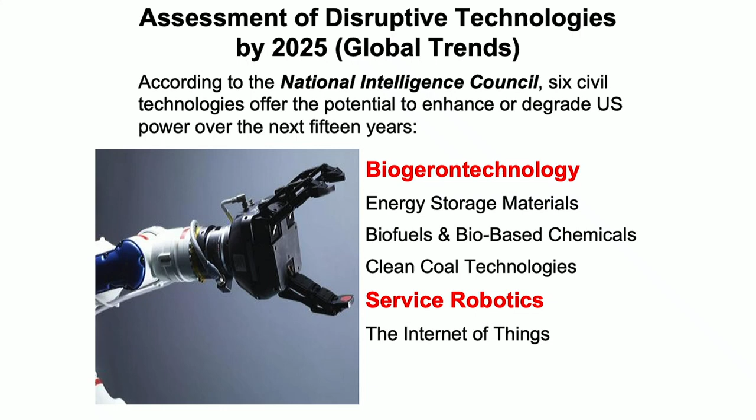And what was really striking to me is that we lose mobility very rapidly. At 70 years old, 20% of the population lose mobility, and by 80, we have 42% of the population, now expecting to live beyond 90 and 100 perhaps by the end of the century. We're going to have really hundreds of millions of people across the world that really have problems with mobility.

And that's one of the places that I see robotics having great help, especially having had parents-in-law living abroad that really needed a lot of attention, and it required ourselves to travel back and forth. So robotics could allow to have even better quality of life for this occasion.

So I like to see all the positive ways in which service robotics can help, and of course try to be very sensitive about labor markets, about the use of robotics for violent activities and so on, which are not in the places where I like them to be, and then focus on what is positive for our societies.

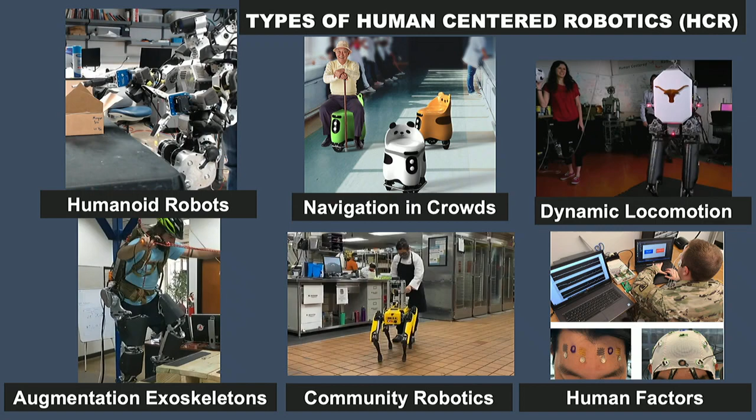And there's basic dynamics and controls studies that allow our students in engineering and computer science to become more knowledgeable of what it takes to control these robots. And finally, human factors down at the bottom. It's becoming increasingly more important. We team up with others developing sensors for brain activity, for stress activity, and so on, because we want to make sure that if there are robots around in our communities, they blend in the right way with us, and we really want them to be there.

Something great that is happening at UT is there's a lot of activity and many companies emerging, and a lot of the robotics and AI faculty have companies, and thanks to UT, this is really encouraged. This is one of them. I've been involved, and they make these really sophisticated humanoids, and it is to be seen if there is a demand to do something useful. For the moment, it's an open question, and a very fashionable open question this year with Tesla and multiple companies in the US and other countries developing this sort of complex machines. So please do write me if you want to come to see them at a certain point.

But one of the things I want to focus on today is a dichotomy, or it could be also blending them together, which is model-based robotics and machine learning robotics. I wanted to make a distinction between the two. So I put this slide up today.

What we see on the upper right side is a model-based approach to robotics in which we build some sort of mechanism. This is an actuator in this case. And we know all of the information about the mechanism. We know the kinematics of this system. We know the inertia properties, the gear properties. If there is any elastic element inside, we also have it very well characterized. And that allows us to put together what we call the equations of motion, or the inverse kinematics or forward kinematic equations. And that will work for decision making or for building better robots, whatever it is, right?

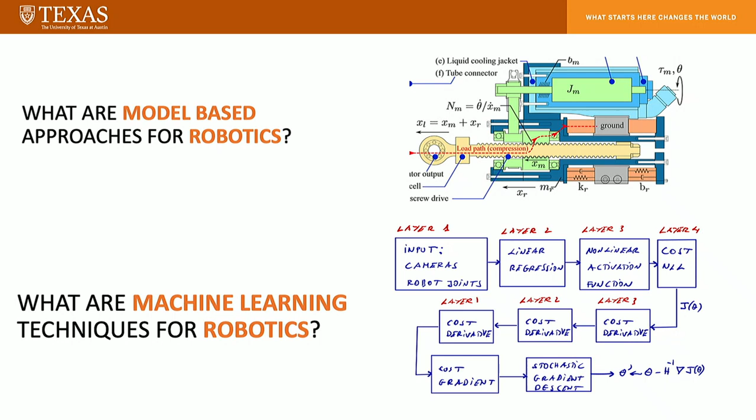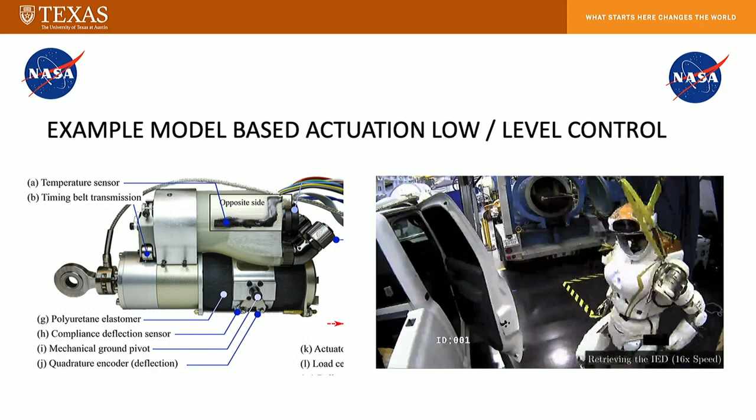So let's start with the wealth of model-based methods that have dominated robotics for many, many years, and that my lab, it turns out, has been involved in. And the first one is precisely these actuation systems, these type of actuation systems.

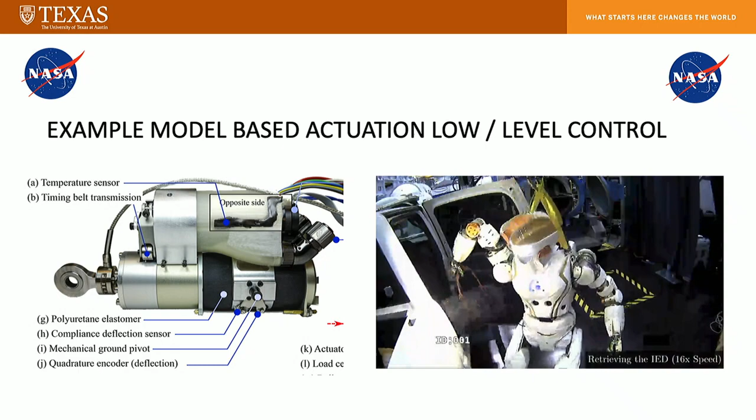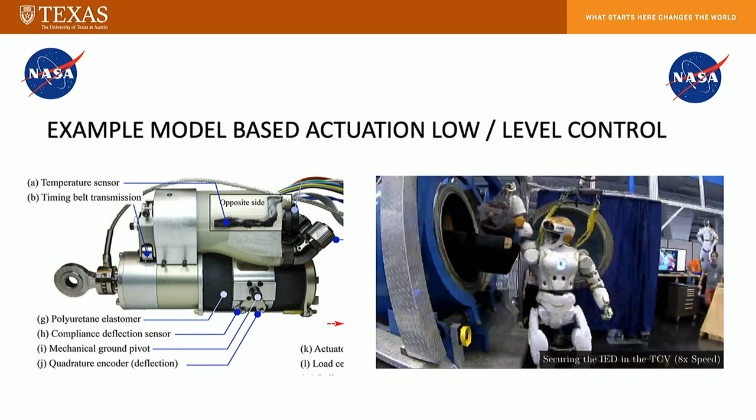Here you see the same drawing we saw before, but now this is really the encasing and embodiment of this actuator. This is taken as a model-based mechanism that's incorporated into the control loop, deploying this kind of humanoid robots like this NASA Valkyrie humanoid robot. And we use other model-based approaches for these robots to do this task. This is highly teleoperated. And there's a lot of cool things that can be accomplished with these model-based approaches.

In particular, the control loop, you don't have to really go into the equation, but in order to control these highly articulated dexterous systems, they have arms and legs and center of mass, and a head has to look into places. They might have multiple contacts and so on and so forth. This has to be formulated into a big problem. So this, we call them optimization problems.

One of the complicated problems of these model-based approaches is models come from sort of offline understanding of the physical world. So when you actually deploy them in real systems, they tend to misbehave. This is in the area of what we call robustness of deploying these systems. So there is a lot of recursion and reiteration of these model-based algorithms in order to achieve wonderful tasks.

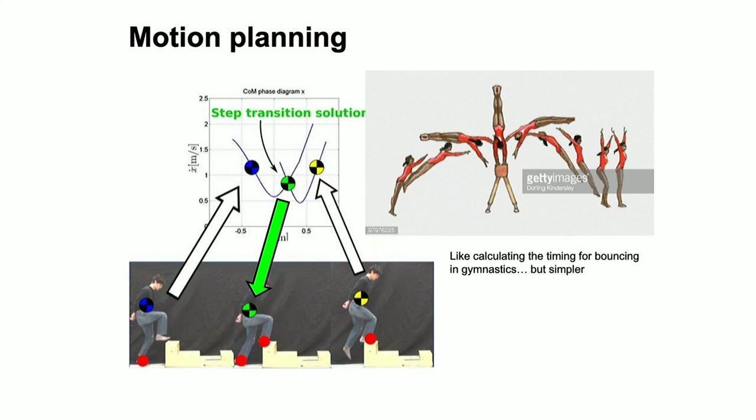And then with this simple model, great things have been accomplished, including a lot of the videos you guys have enjoyed from Boston Dynamics and other companies. What you see on the right side is the trajectories can be predicted for walking on something called the state space of this system. So once you have these models, now you can take decisions on when to switch a contact, when to apply contact with the hands, and so on.

And just using these simple inverted pendulum models, you can explain and you can control behaviors like walking on rough terrains or doing some of these wonderful Olympic feats with these very simple models, okay?

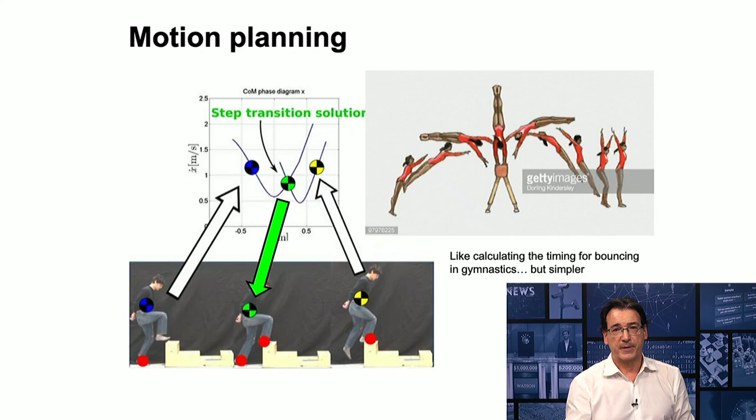Going back to where we were before, here is more kind of the nitty-gritty of what really happens underneath. The model up there, if you know Simulink and MATLAB, is exactly that kind of model-based approach for walking. I'm not going to go into these equations, but when you deploy them in real systems, there is a lot of uncertainty. The place where you thought you were going to put the foot, your foothold, it doesn't happen. There is uncertainty on the state estimation of where you think your body is, the velocities, and so on.

So this can still be analyzed with kind of classical control approaches, and a lot can be done, but there are certain limitations to all of this body of work on locomotion.

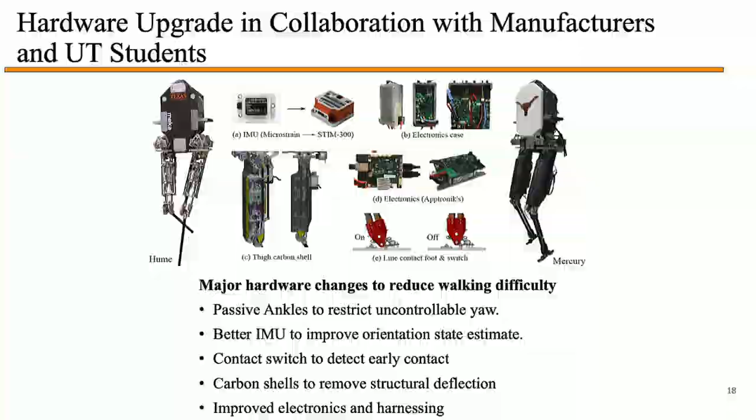Now, another thing I want to bring up is that to reduce the gap between the models and the deployment, we need to build better hardware. That's often done iteratively, right? So building robots that are okay from day one is difficult. Fortunately, we have the opportunity of improving structures, controllers, and sensing, and so on and so forth. But if you do all of these, then you accomplish behaviors like these ones.

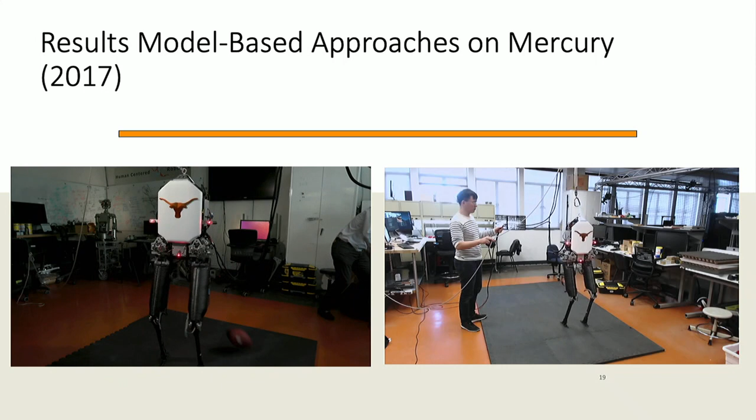These are model-based approaches, with these kind of tiny feet robots, we call line feet robots, accomplishing these incredible dynamical behaviors and with quite a bit of robustness, okay? Just wanted to bring you this awareness to what we're capable of doing with model-based.

Other places where we see model-based making a strong impact is on industrial robotics, especially now that the US is doing terrific with e-commerce, with providing truck loading and logistics for like FedEx and UPS. This is a company we collaborate with, Dexterity.

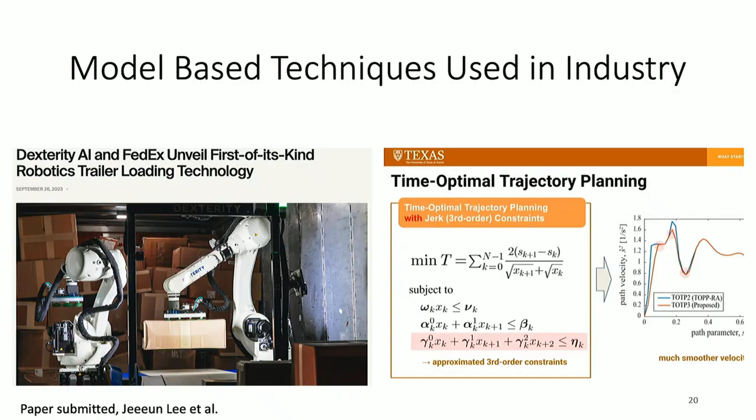And in particular, what you see on the right side is the use of similar optimization algorithms, model-based, where we take into account certain types of behaviors, vibrations, and so on, also model-based, and that improves tremendously the efficiency, the speed, and so on of these systems. Another example of model-based. The final model-based I wanted to show is on exoskeletons.

Exoskeletons haven't made quite the impact that we expected in the communities, but they use also control algorithms such as those ones. They look really similar to what we saw before. Everything here is models of transformations of coordinates, the models of the gravitational effects, models of the forces, and so on and so forth. It's still model-based. We also utilize models of the human muscle.

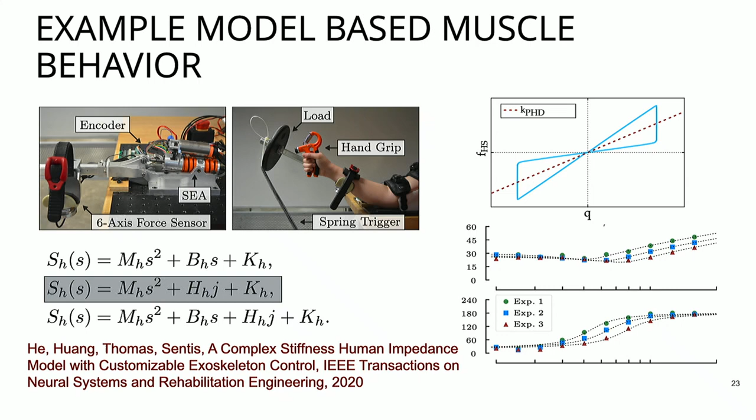And in particular, we try to learn the kind of non-trivial, non-linear dynamics of the human muscle, because once you are attached to an exoskeleton, you are a coupled system, a human-machine system, and you need to have a certain model of the human.

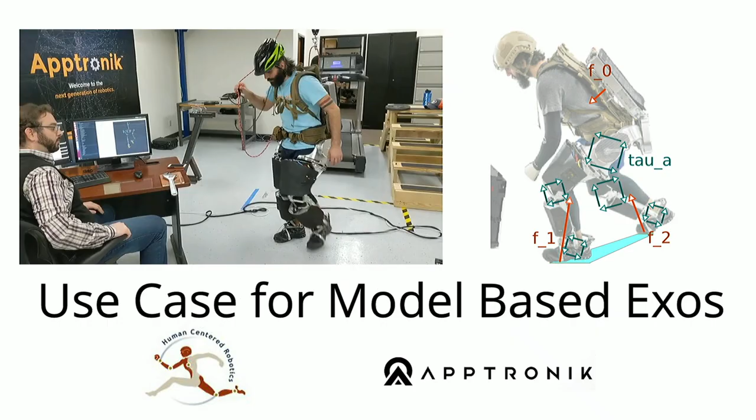And for these intelligent behaviors, once you have the two of them, you can apply, again, model-based signal processing algorithms, and then you can accomplish these very cool behaviors of what we call strength augmentation, or people who have kind of weak muscles being able to regain walking, and things that we believe are going to be important down the line with the pyramids of population that we're seeing today.

So let's put aside all of this wealth of models that we've seen. Let's start an intro to the use of some learning approaches. And in particular, learning has been very useful for approximating the dynamics of these systems. And a lot of the computations that you see in these optimization methods are really lengthy. So machine learning offers us the possibility of approximating those systems, computing these behaviors very fast.

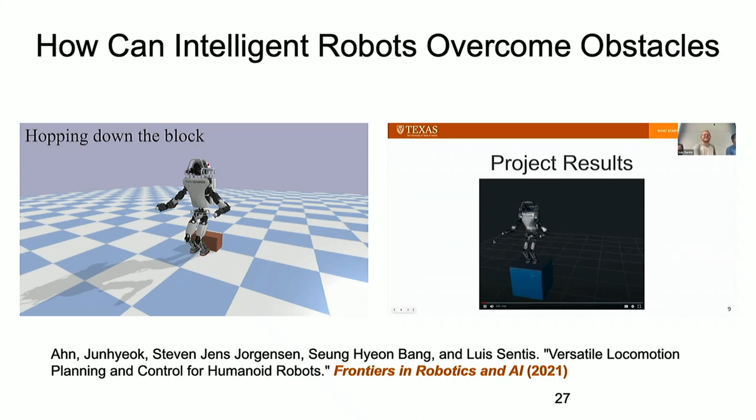For instance, let's say that you want to accomplish walking in these environments. For that, you need to have what is called the elevation map. You need to know all of the obstacles and things that are in the environment. And now, let's say that you still want to use model-based algorithms producing these behaviors. Every time that you consider a foothold as a candidate, you need to compute all of the kinematics of the robot, which is a very expensive computation as a model-based. So what we can do is approximate it with a neural network.

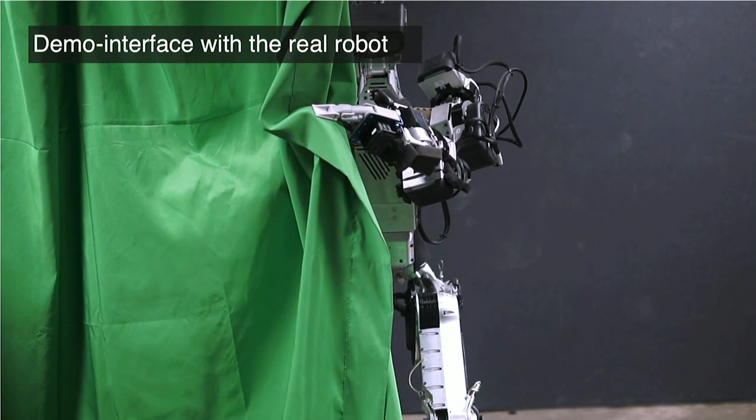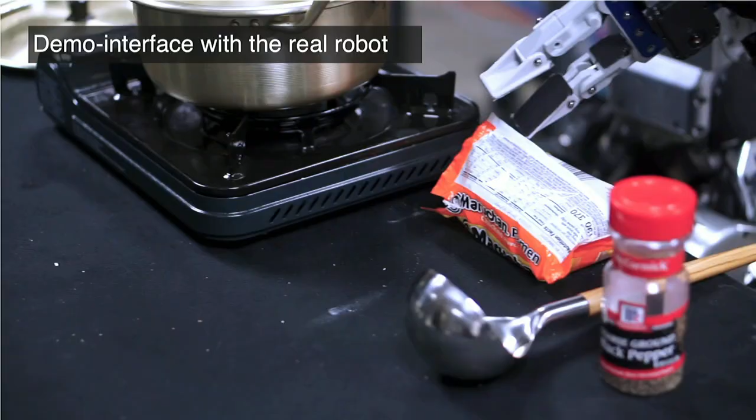Now, this is what we do first. First, we try to have fun. And in this case, we have one of our humanoids, Draco 3, purely teleoperated. And it shows you that by teleoperation, which is the means by which we accomplish imitation learning, these robots can do quite a bit of things, right? They can do a whole meal of ramen, which turns out my students love to do.

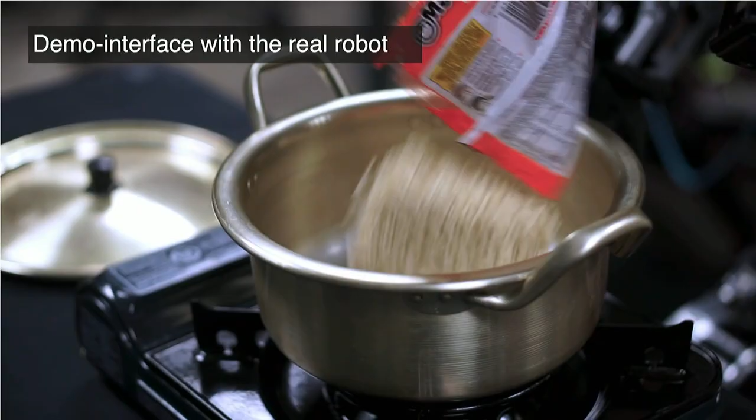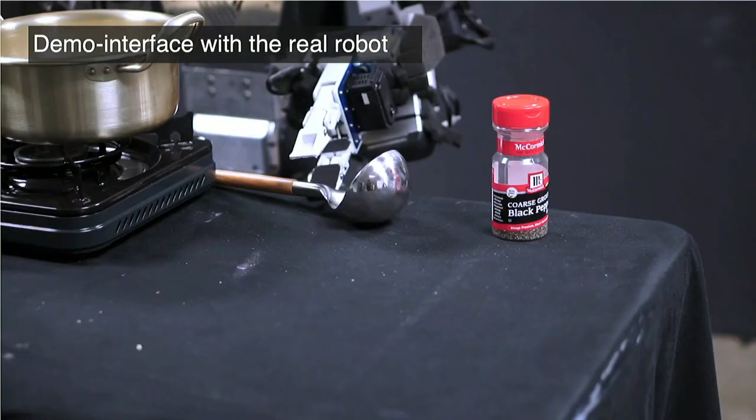Can this construct that we have do the entire thing on its own? And not only can it do it on its own, but you have variability over these objects. Maybe the pot is bigger, and there is more ramen, the box is different, and everything is different, and it is kind of robust to all of this. Those are the questions and the promises that we have soon for these types of operations. I'm not going to go through the whole video, but they ended up eating the ramen, I can promise you.

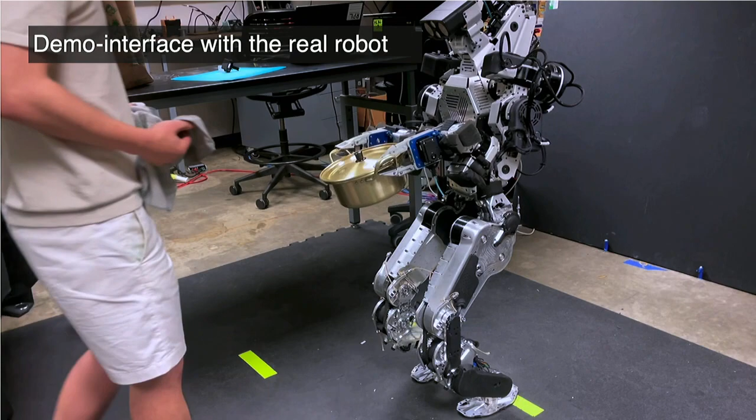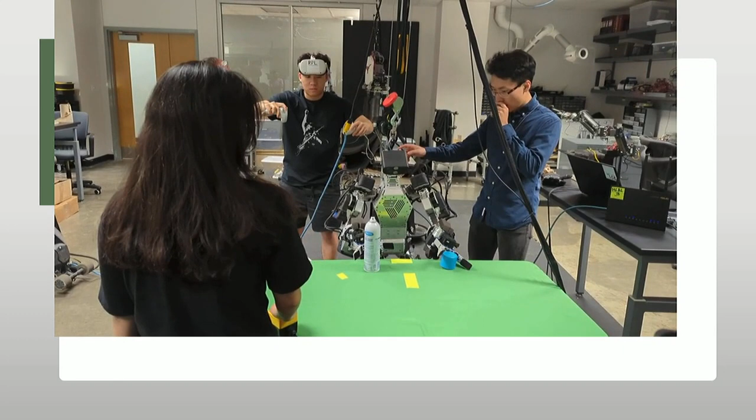Now, what is under the hood is for more practical tasks. Here, for instance, is the disassembly of a cap of a can. We have a teleoperator, somebody at home perhaps that wants to teach that for that particular can, and he does it over and over. And one of the key questions here is, well, how many times do we have to do this? It turns out that currently for our method, we have to do it 250 times, right?

That's, I want to say, unreasonable, that a robot comes home and you have to spend 250 times to teach it how to pick up your broom, okay? So hopefully in the future, we only have to do it a couple of times, and then it kind of leverages these few shots for generalizing.

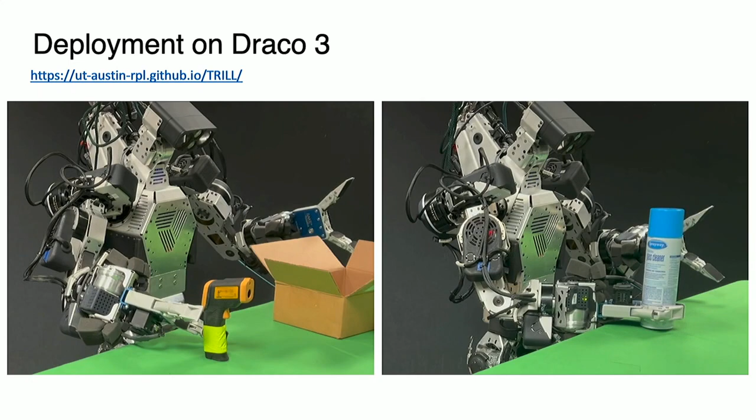So here's the outcome. Maybe the right side is a little more interesting. There's a dual arm behavior, and it has indeed learned autonomously to perform this sequence of tasks, to trigger them. There is nothing rule-based here. It has learned when to open and close, and it does it over and over with a certain level of variability, in that we place the can in different places, and it does it, right?

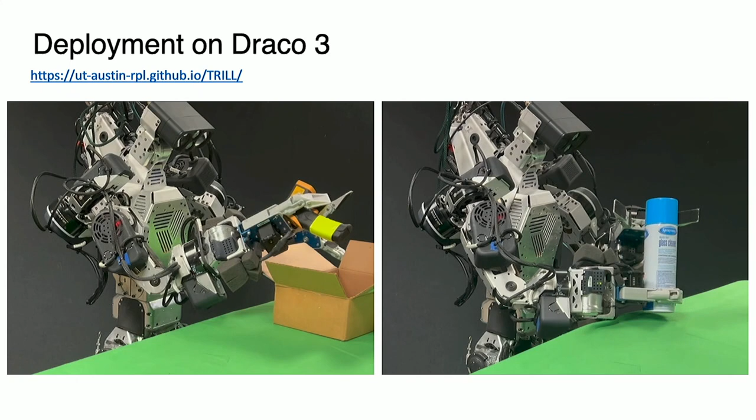And ideally we want to have this for different cans, sizes, completely different places, postures of the robot, and so on. It's coming really, really soon. And here we can do similar things in simulation for now that involve at the same time walking behaviors. This is now in progress. We'll have it soon in the real robots.

If I may, do I still have some time? Yeah. So maybe 5 minutes? Okay, great.

So as you may know, we have this wonderful organization on campus called Good Systems that brings together a variety of people from everywhere, from humanities, from the schools of public affairs, from engineering and computer science and so on. And that allows a wider conversation of why intelligent robots are needed, or are not needed if we discover they are not, right?

And so here, just a few of the people and the diversity of backgrounds, if you know some of these folks. But one of the projects that we are investigating is what we call Living with Robots. It's supported by multiple sources of funding: a traineeship from NSF, and we have something called a Growing Convergence Research grant as well. And we are deploying robots on campus.

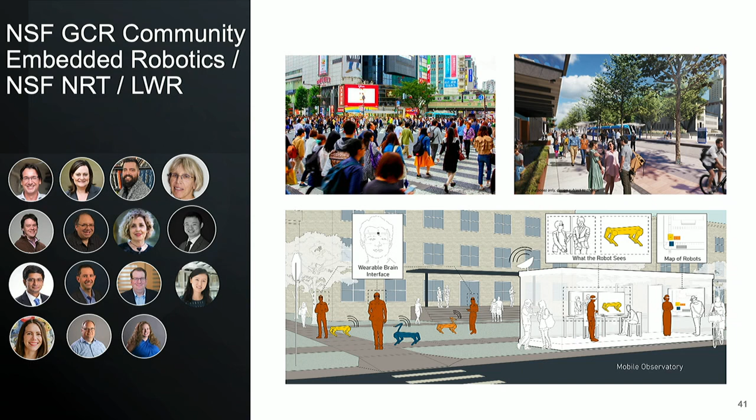Those robots are quadrupeds, Spots. You might have seen them on campus. They are delivering services such as tours, such as inspection of buildings in particular. So they're just looking around and saying everything is okay. And then in the future, they might deliver escorting services. We've conducted interviews, and some students are worried at night, and they want a robot connected to a phone line to be following them, if you will, and delivering objects and so on and so forth.

But what is important is to understand if people on campus feel comfortable with these robots and what other things they might expect from these systems. Aside from doing their business, they might expect that the robots can be stopped and you can ask questions. Please indicate where such and such building is, or hey, there is a bunch of people down the street, what's going on? The robot might answer, oh, there is a celebration for the baseball game, whatever it is, right? So there are some other social services. We're trying to discover how these robots can be useful for our society.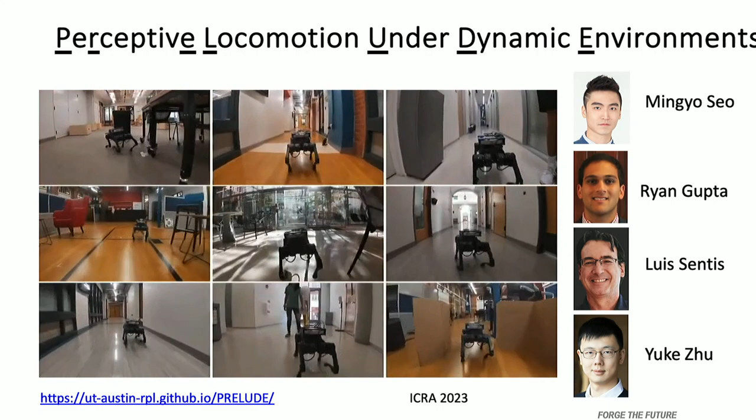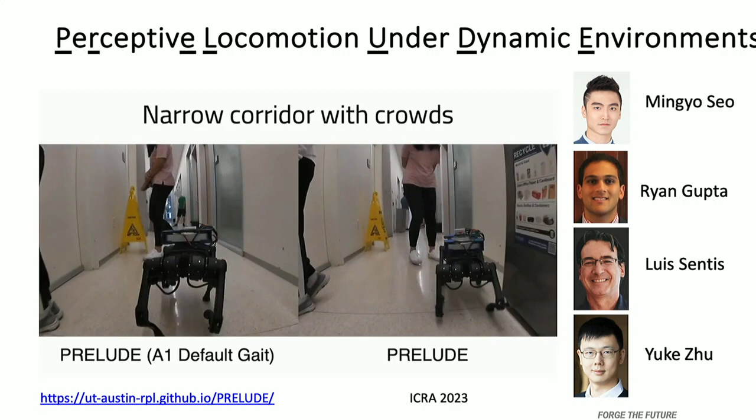But one of the things that this leads to is that these robots, in the autonomous world, in the intelligent robotics world, need to be able to understand how people are moving and then avoid collision at all costs. And that can be done in many ways, but we can leverage similar techniques that we saw before in terms of imitation learning. So here, also work with Yuke and my lab. We see on the top side, it went really, really quickly, an imitation learning algorithm similar to what we saw before. And there's a reinforcement learning process that learns to turn very quickly.

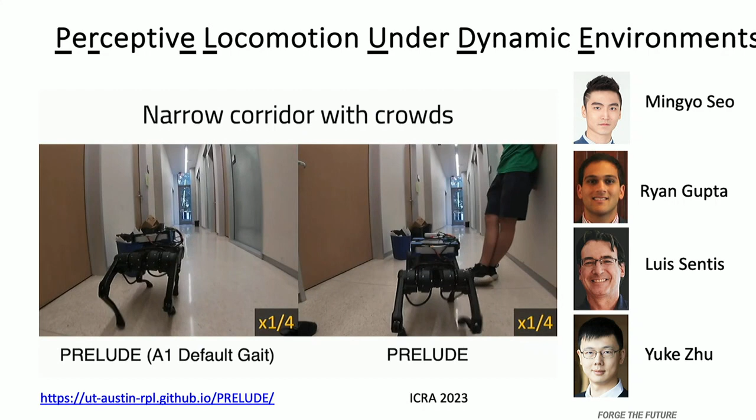Because as you can see here on the right side, the robot is avoiding everything in this very narrow environment. It's avoiding every pixel. It's not putting a bounding box on the human and avoiding the entire human. It's taking all the pixels and constructing a policy where it decides to turn left and right based on every single pixel that it's seeing.

And for that, we need large data sets. This architecture that we showed before, I'm going to just skip it, where literally we have students driving cars for many, many hours, over many days, over many different environments, with people, without people, narrow and wide environments, and so on. And those data sets allow this supervised learning approach in order to learn to not collide and avoid these people around. This is a study by my lab and Yuke. It turns out that other people involved in this Good Systems project are studying the same thing being done outdoors, and that's going to allow better safety for our robots.